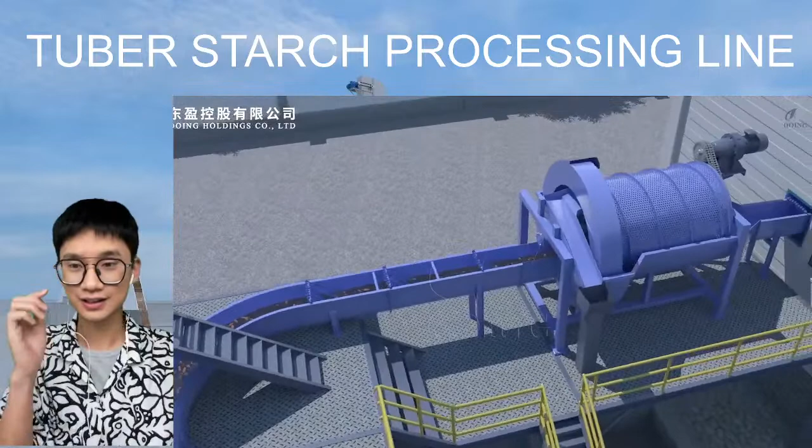All right, so now let's directly check about the whole processing line, and for our company, how we control the 3D.

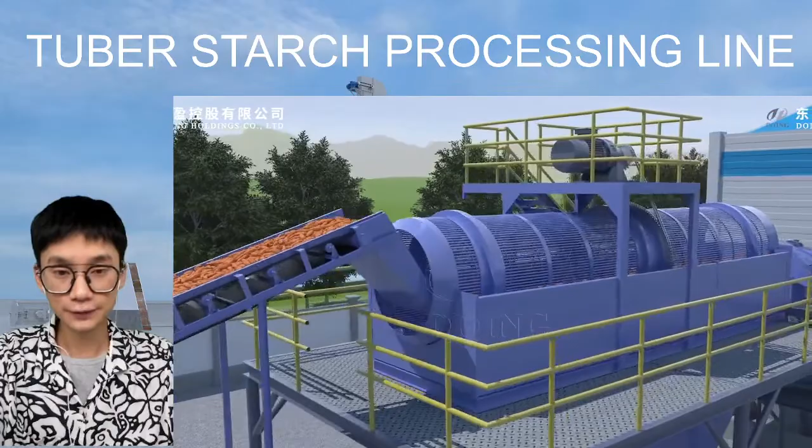For the first part that we use, it is the removing impurities part, or we can call it the washing part. Can you see this? This is called the dry sieve. When it is working, it keeps rotating, and when the raw material gets into this equipment, there is a really special helix design adopted inside. When it is working, all the raw material will rush against each other to remove the impurities on the surface of potato, sweet potato, and cassava.

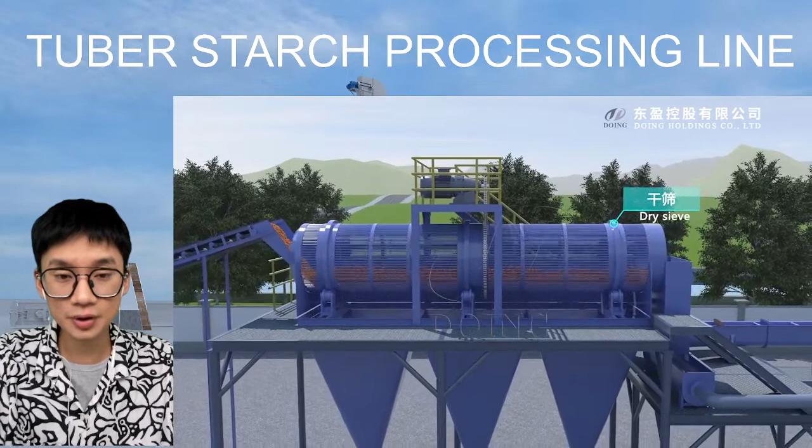At the bottom, you can see this is the impurities outlet. You guys can see here, this is the impurities outlet, the bottom part.

So normally we will suggest our clients set this equipment outside the workshop so we can easily make sure the whole workshop is clean.

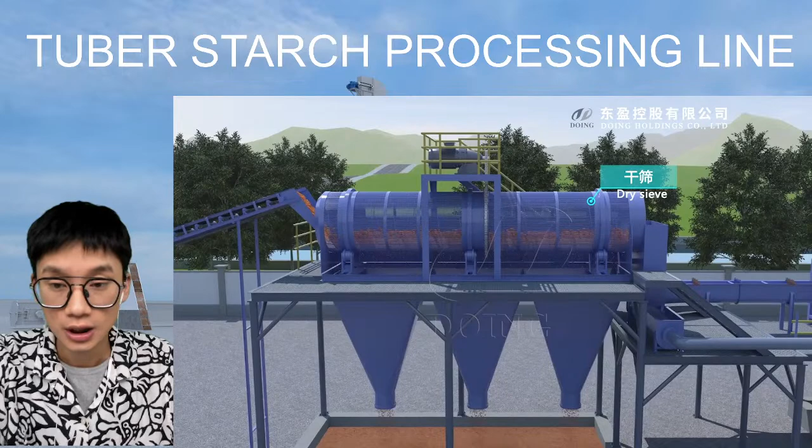It has a really simple structure, I believe you can see it clearly. Since it has a simple structure, when it is working, it is easy to maintain and easy to handle. And then there is our belt conveyor, water conveyor here.

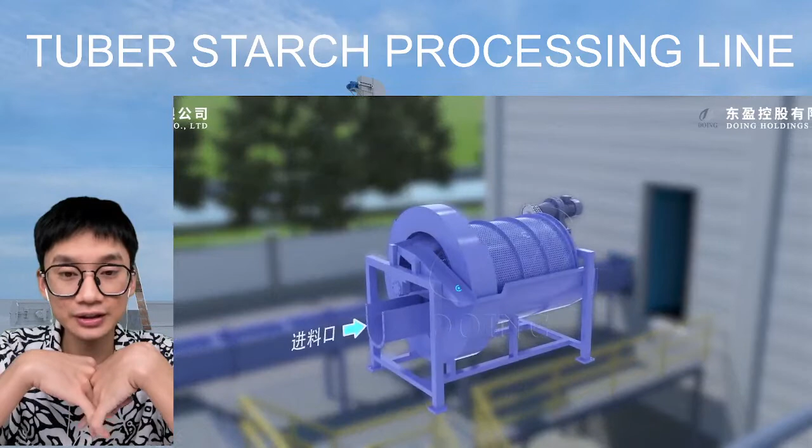And then the next part, it is our destone machine, destoner. Because the raw materials have different gravity and different weight from the heavy impurities like the stones, through this equipment it can remove the stones, remove the heavy impurities in a really efficient way.

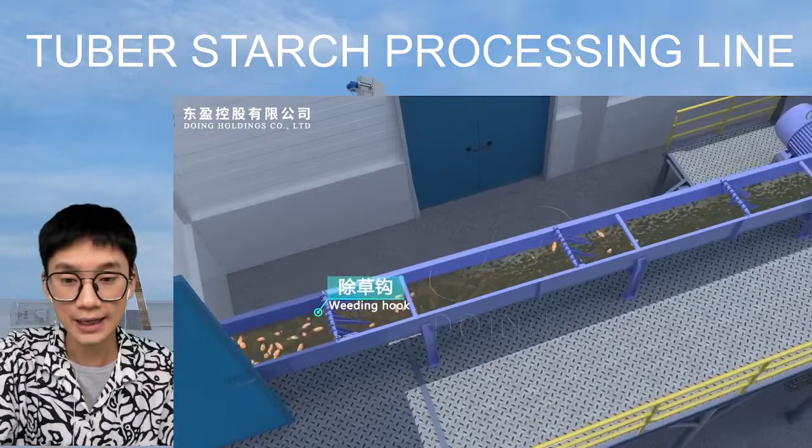And the next part, it is our rotary washing equipment. When all the raw material gets into this equipment, let me just pause it here.

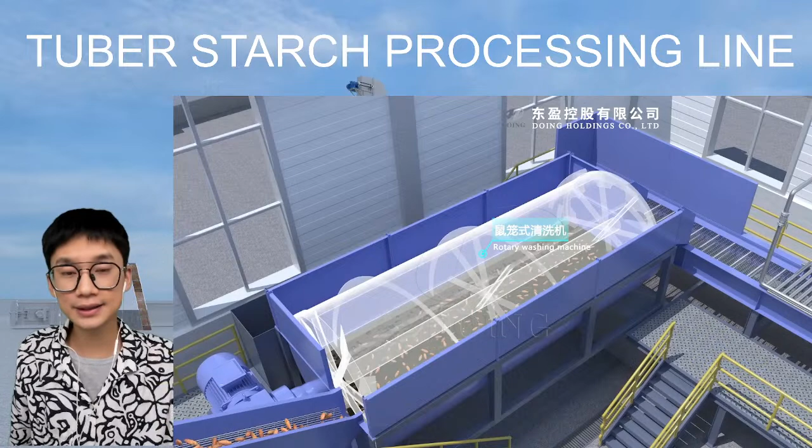And for this rotary washing equipment, it adopts the counter-current washing principle. What is the meaning of counter-current washing principle, ladies and gentlemen? You guys can check - at the bottom there are two kinds of valves.

Hey, how are you, Tony? How are you, Tony RD?

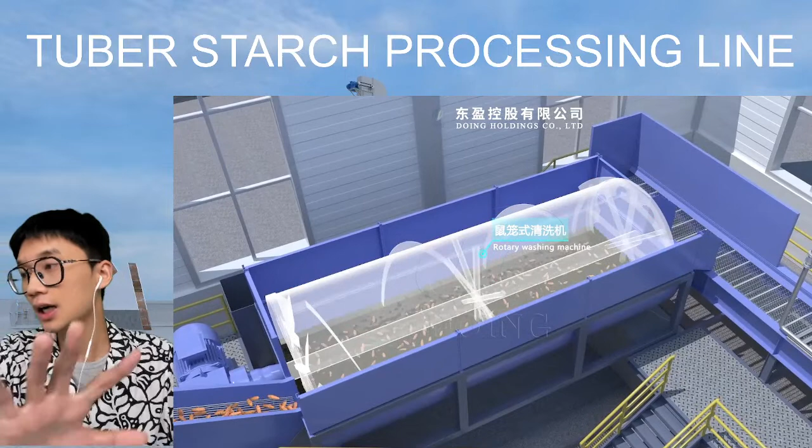And this is our rotary washing equipment. Inside the equipment, we adopt reusable water. So all the water in the whole processing line is reusable, and do not worry about the water quality.

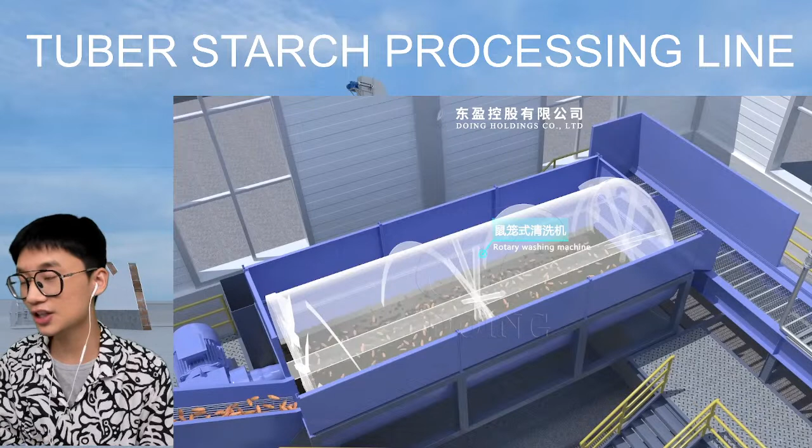There are some clients and viewers curious about the question like, is the water clean? Will the water totally affect the final quality of the starch? The answer is no, because we do have the water system, the polluted water treatment system.

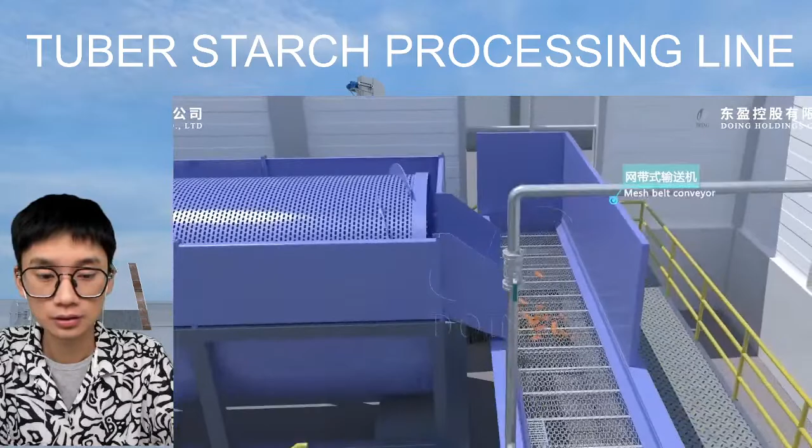And then let's keep checking this whole line. Yeah, ladies and gentlemen, check this part.

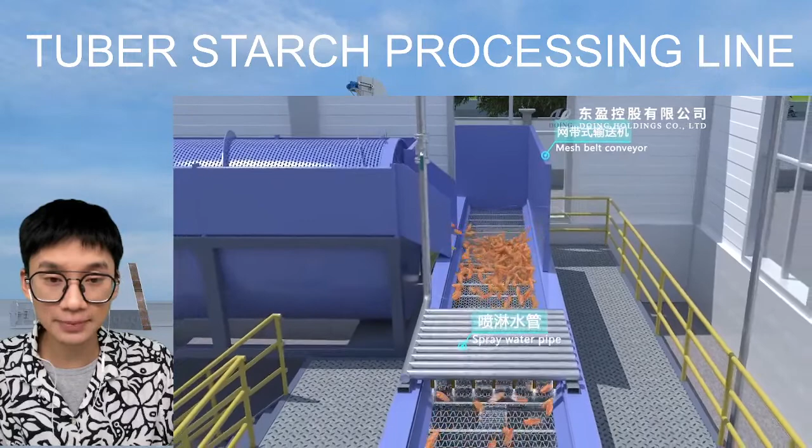After washing by the rotary washing machine, then we have the mesh belt conveyor, and then we have the clean water pipe here, or we can just call it the spray water pipe, to wash all the raw materials again to ensure the final quality. Especially for the raw materials, we have to wash them really clean so that after we cut it, after we wash it, we can obtain high quality tuber starch, cassava starch.

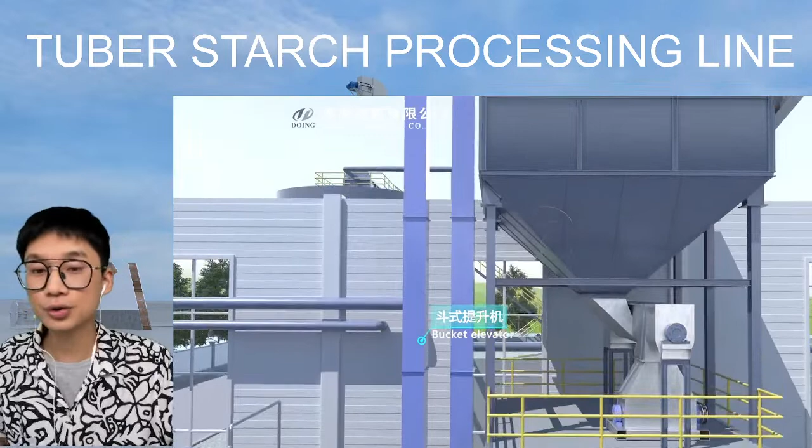And that is all for the washing part. We have the dry sieve, we have the destoner, and we have this one, the rotary washing equipment. For these three equipment, they are more suitable for potatoes and sweet potatoes, those kinds of big size raw materials.

And from now on, hey, how are you? Welcome to the live. Hello, how are you? This is Oliver from Henan Doing Holdings. How are you? How's your day going?

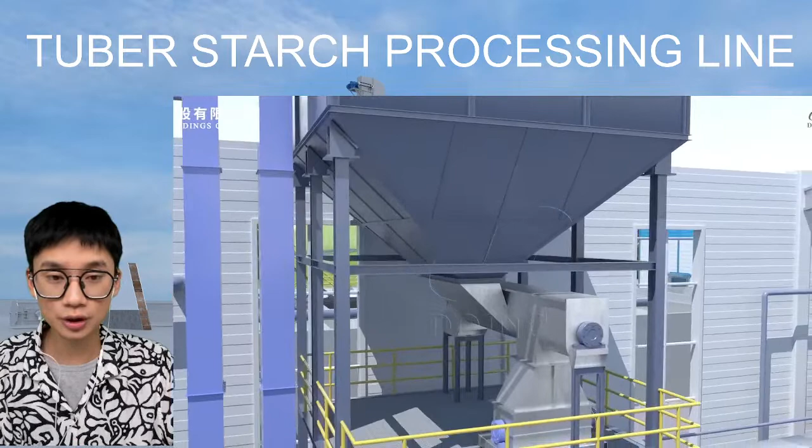There are two ways to totally crush the raw materials. The first one is our cutting machine. Check about this one. This is our cutting machine, and the material is made of 4Cr13, which is really durable equipment.

With this kind of raw material, we can use the equipment for more than 1 year or 2 years without any questions. It's really durable, long service life. If you guys can see it clearly, you may notice the size and shape of the knife, it's a really special design.

It is a diamond knife design. This equipment is mainly to cut all the raw material into small pieces, normally around 3 cm to 5 cm, so that we can better rasp all the raw materials and improve the final starch rate.

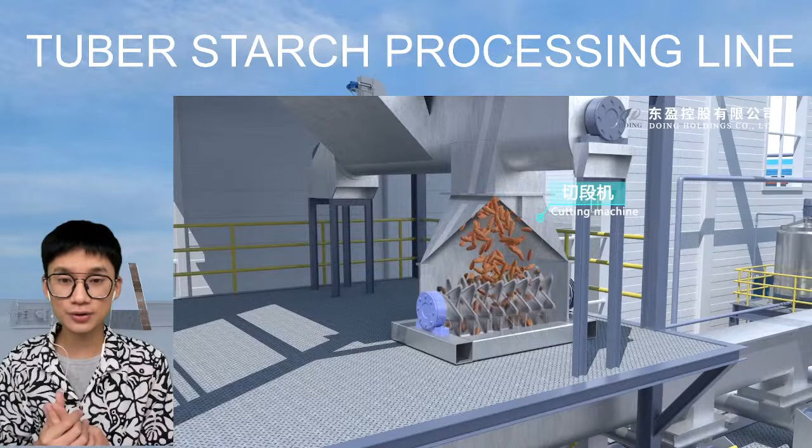By the way, there are two kinds of blade adopted inside of the equipment. There is a rotary one, and there is another type we normally call a stable one.

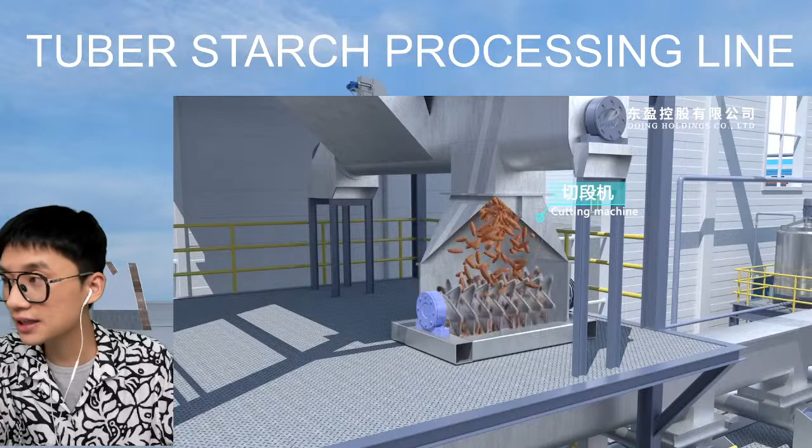After the cutting machine is our rasper here, but before the rasper, we set one of the magnetic separators. Let me show you the details for the magnetic separator.

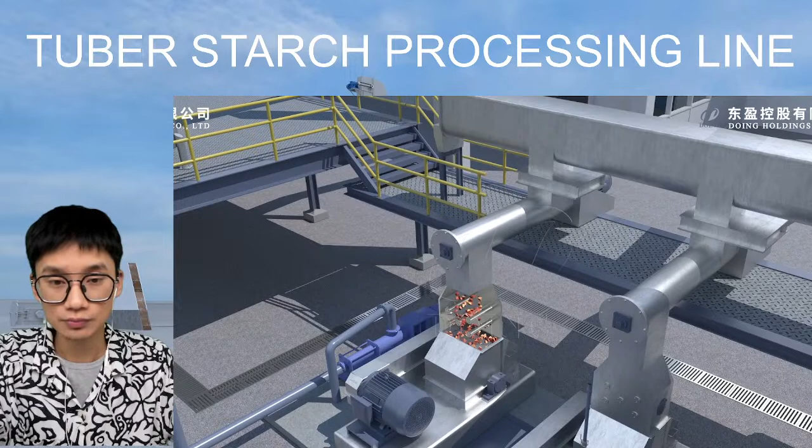For this whole production line, all the raw material is transported by vehicles. So to make sure that our whole rasper is totally protected, we do set up the magnetic separator here.

With the protection by the magnetic separator, we can use the rasper to handle more than 3,000 tons to 6,000 tons of raw material without any questions, which is really durable equipment. And then it is our rasper.

Check about it, there is a really huge rotary drum inside of the equipment. The more capacity you have, like the smallest capacity, there are also more than 80 blades on the surface.

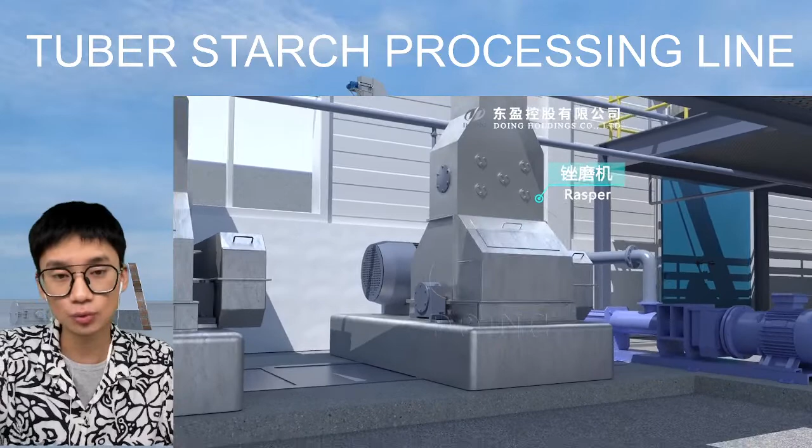But if you do have a bigger capacity, it will have more blades, like around 100 or 200 blades, and the crushing rate is about 96%. It's really high efficiency.

Let me give you an example. In the market, there are so many different kinds of crushing equipment, for example, like the hammer mill.

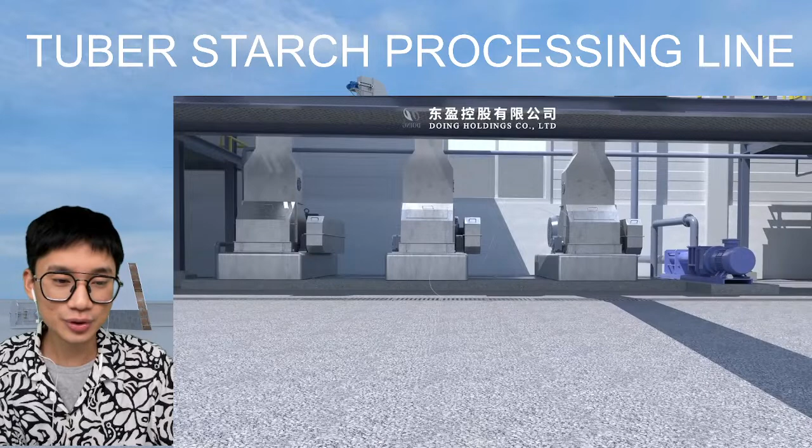This is our rasper, and if you need anything related to starch business, flour business, and garri processing line, we have all the equipment here, so you can just easily drop anything in the comment area.

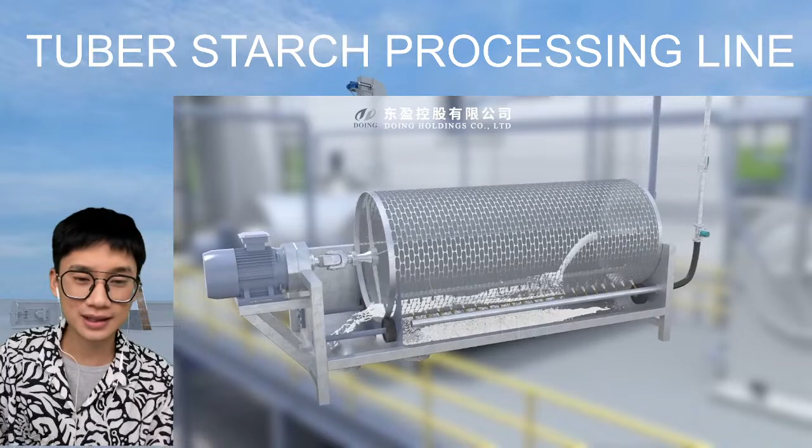All of the materials inside this whole processing line are made of 304 food grade stainless steel, so no worry about its quality. Some people will ask, after long years, like more than a year, is it more easily to rust? The answer is totally no, because the raw material is 304 food grade stainless steel. It will not have that kind of question or problem.

And then this is our desander. Because in the cassava tubers, the potatoes, or the sweet potatoes, even though all the raw material has already gone through 3 washing equipments, in very tiny places there can still be some dust or other tiny impurities. So we do have the desanders to remove the sand another time, to make sure the final quality for the starch.

And due to the different gravity and weight of sand, fine sand, and the cassava, potato, and sweet potato starch, the sand weight is normally around 2, while the starch quality is mainly around 1.6. So we can easily remove the fine sand with this desander.

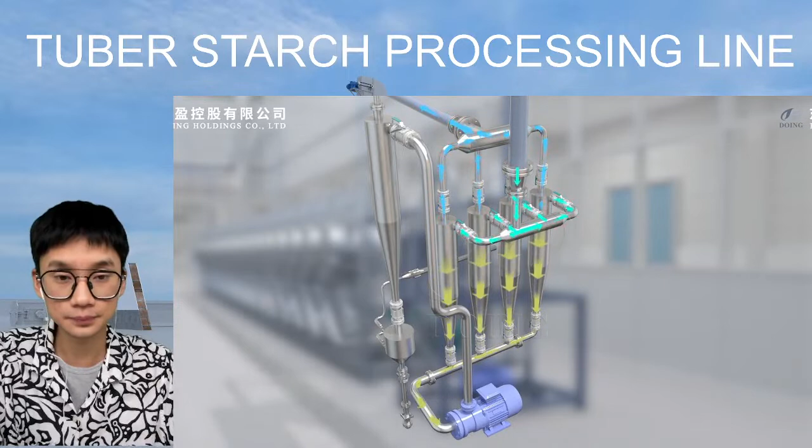And then this is our hydrocyclone station. You guys can check about the hydrocyclone station. It normally has 18 or 19 of the equipments here, and it is a totally sealed equipment.

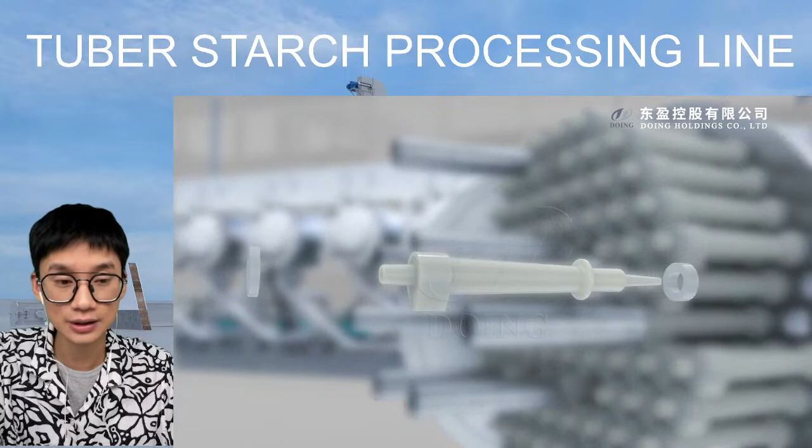Let's see the inside. Inside here, there are a lot of tubes. It is inside the hydrocyclone station. See about the tubes. When all the starch gets into the equipment, it will keep swirling, and due to the force of weight and gravity, all the heavy impurities will move to the bottom part, removing at the bottom part.

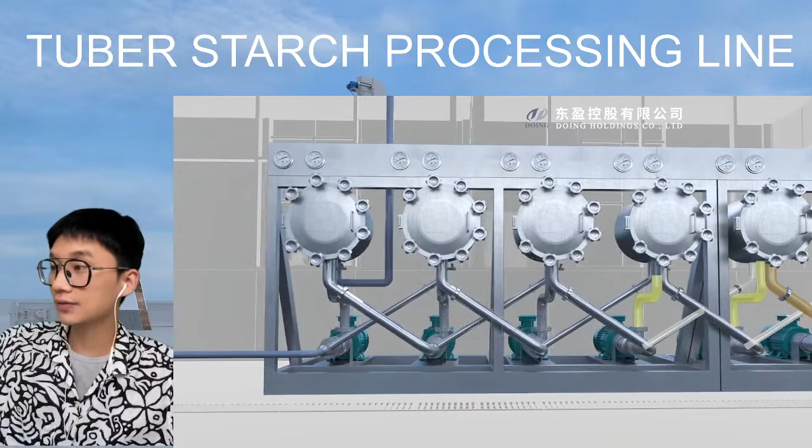This is Oliver from Doing Holdings. Our company is in Henan Province, China. That's our factory. We have 2 factories in total, with a final amount of about 40,000 square meters, with more than 200 workers producing the equipment at the same time.

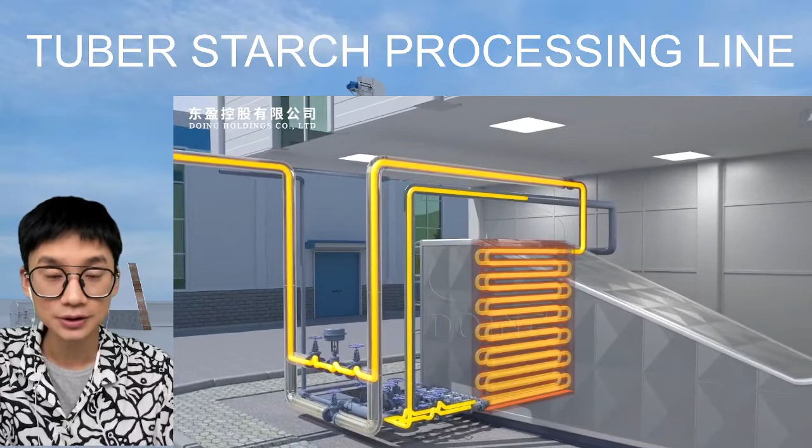Hold a second, let me just post it here. For the flash dryers, we are using a really special design pipe. You guys can check about the size for the pipe. It is bigger size, smaller size, bigger size, smaller size. According to this kind of design, we can prolong the drying time for the flash dryer.